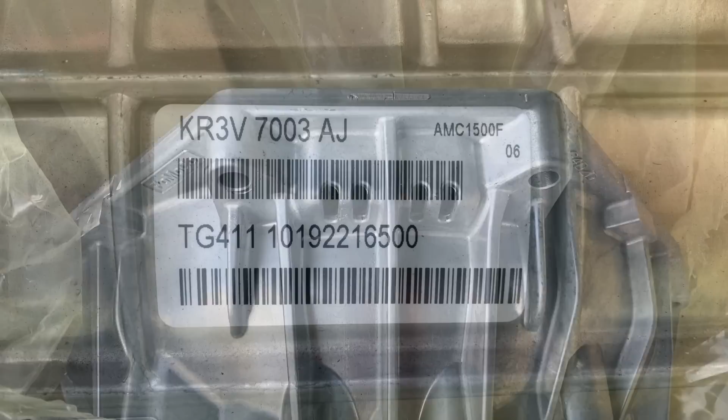I'm here again with Carey, the Shelby Guru, the Shelby Whisperer. We've got my 2020 Shelby GT500 carbon fiber track pack up on the rack, and boom, new transmission.

What do you think of this project? Not too big, not too big. Well, not too worrisome. We're about to find out. Here we go. Thanks for watching.

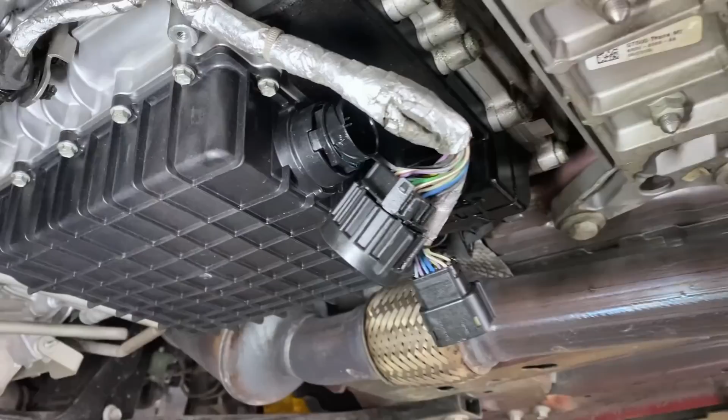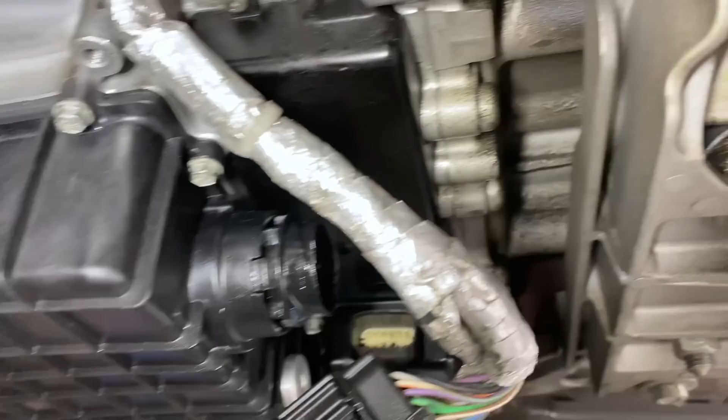Let's talk about why I'm getting a new trans. First of all, my trans works great, and I drive this car a lot. But if you see back here, it's all wet. Back up in there, it's got a slow leak in a non-serviceable area, so it's always wet on the back side. You can see all up in there, and there's some trans fluid there. So, a new tranny.

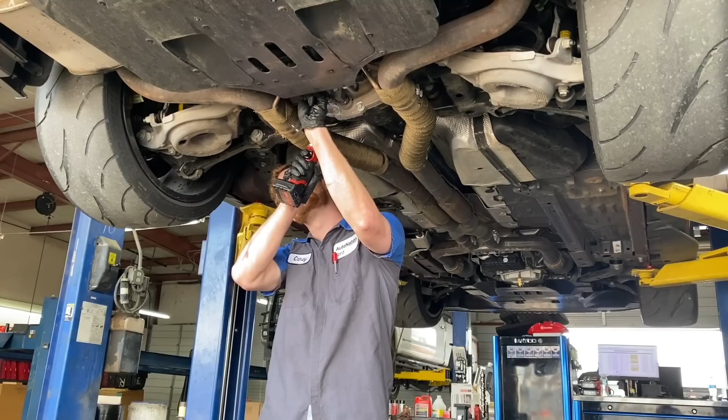Carey, you taking the exhaust off first? Yeah, to get access, makes sense. Start with the rock catcher, the closeout panels full of rocks.

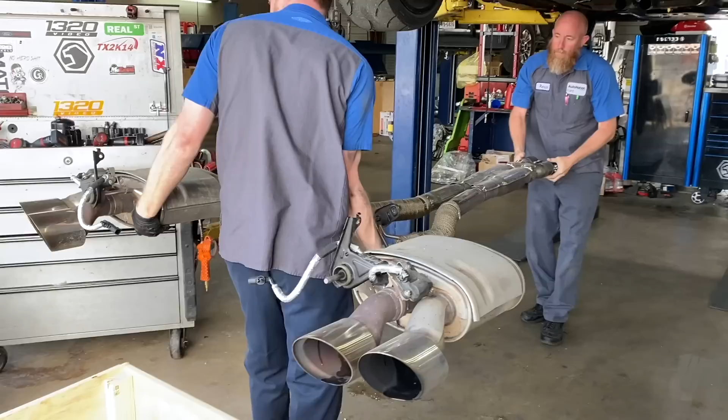Taking off heat shielding. Taking off the bottom closeout panel up front.

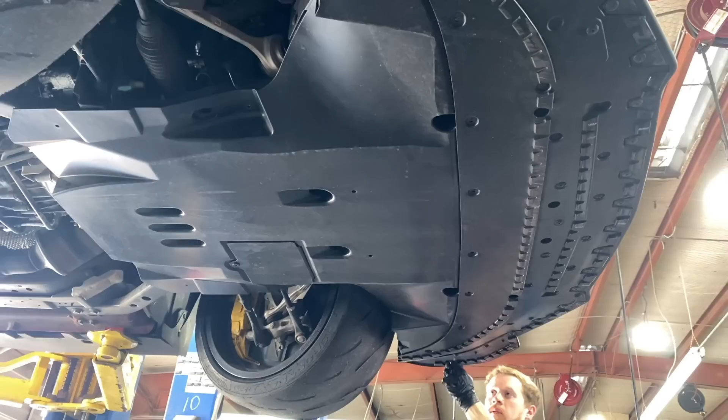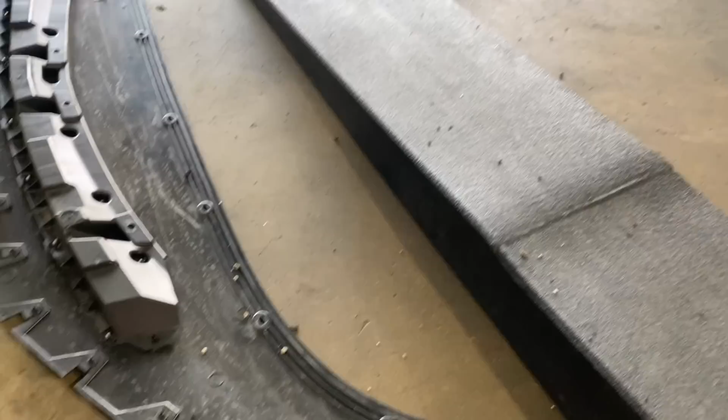In order to get the closeout panel off, you got to take the bottom piece of the splitter out. In order to get the bottom piece of the splitter out, you got to get the splitter wickers off, if your car has those. Splitter wickers and the bottom piece of the splitter are off. There's the bottom piece of the splitter. Now you can get access to the bolts in the front of the closeout panel.

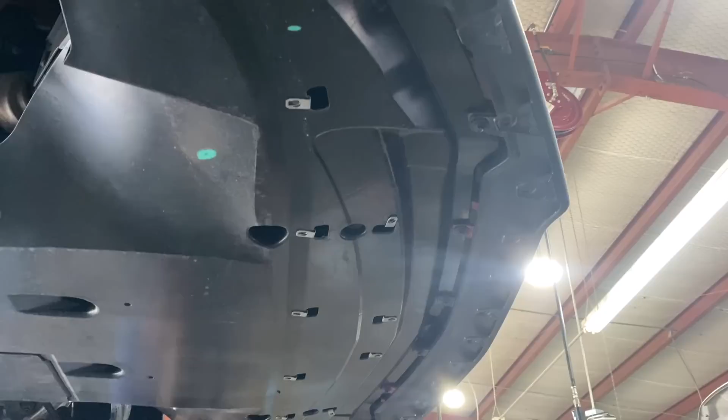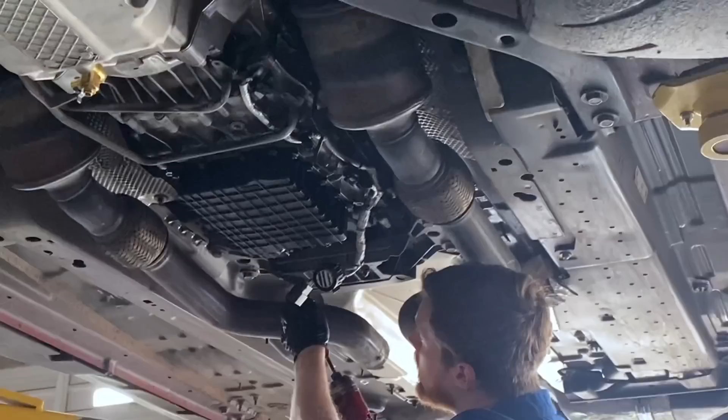Mr. Carey, what you doing now? Took the trans fluid lines loose, and then I'm going to go ahead and take the driveshaft heat shield off. Using a 24 millimeter socket to take off the driveshaft heat shield.

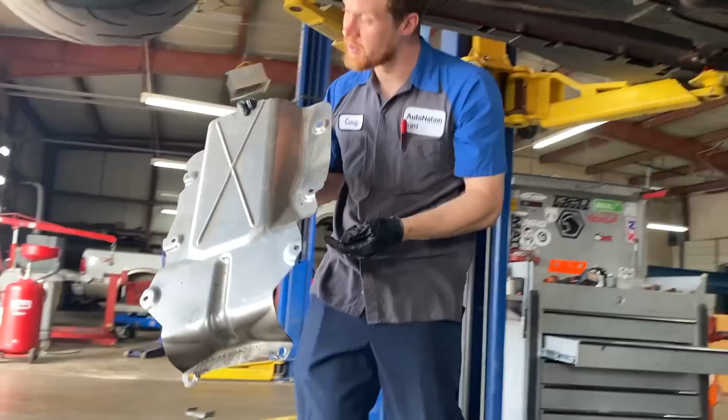Kind of weird nuts on those, something along those lines that I don't quite understand. Driveshaft heat shield off. Marking the drive shaft to the rear there? Yes, you would do it up front if we weren't replacing the trans. Parts are accumulating.

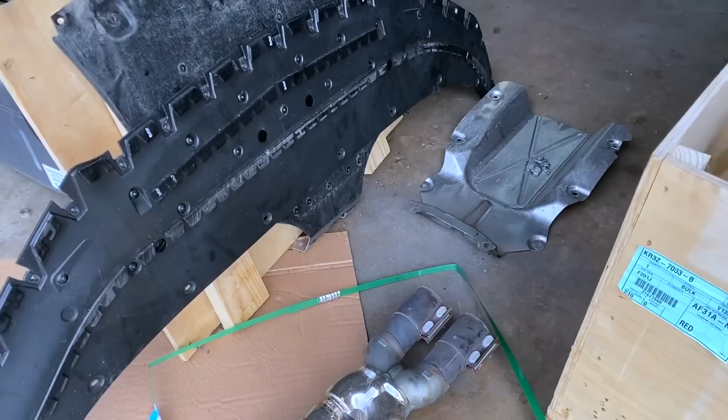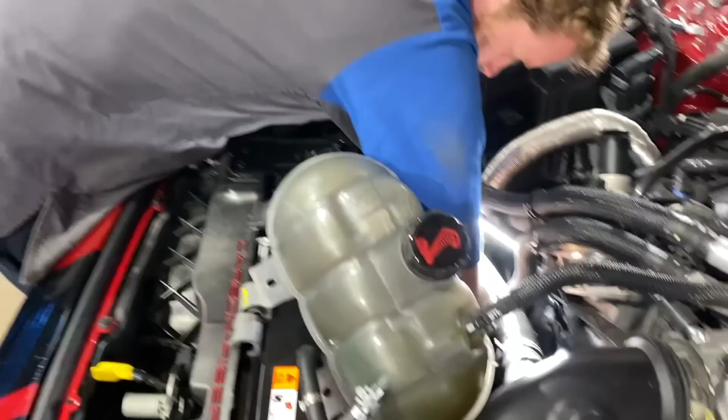Closeout panels, shielding, new trans. What you doing down there, Mr. Carey? Disconnecting trans lines - the transmission cooler lines.

What you doing up there, Carey? Pulling the starter off to get it out of the way, just to clear up room so I can pull out the trans lines as easily as possible to prevent tweaking them.

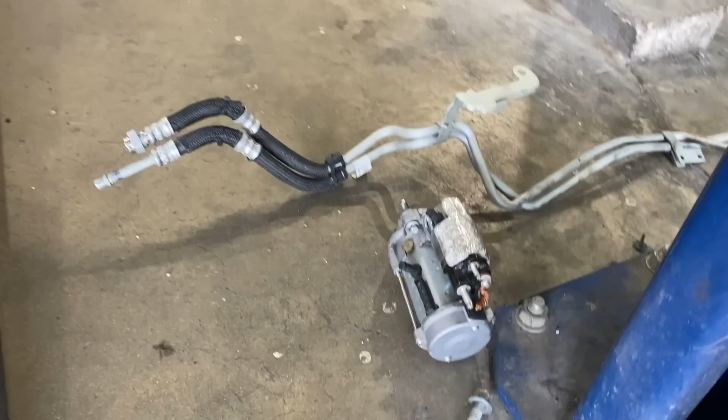What you working on now, Mr. Carey? Moving the trans cooler bracket out of the way. And then over here we have the starter and trans cooler lines removed.

All right, time to remove the cats. Sometimes these upper - is it a bolt or nuts? It's a nut on a stud, the stud is through the cat. Sometimes they're a pain in the ass, huh? Yes. Oh, that one's bad. Ah, good.

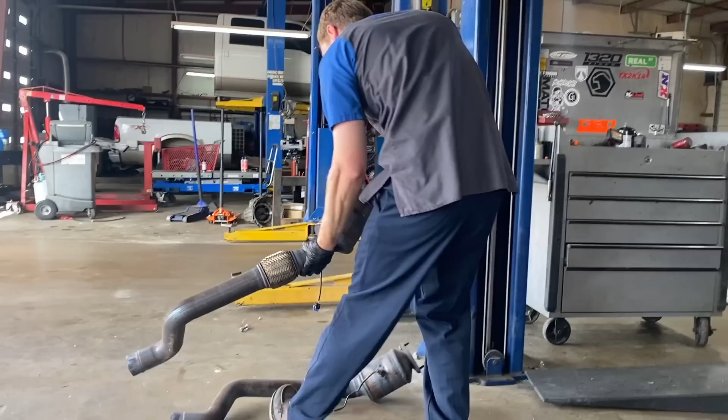All right, cats are coming out. One cat, two cats. Drive shaft coming out.

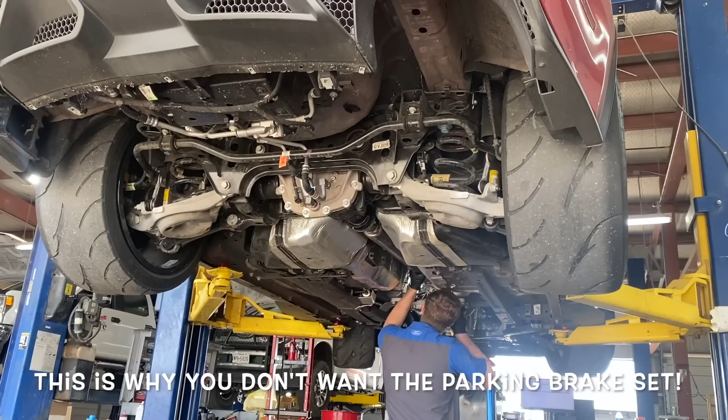Working on the manual park override, getting to that release from underneath the car. Carey held the override, which is spring loaded, and then we rotated the tire to get the drive shaft rotated so we can get to the bolts that were up on top, which are now on the bottom, working on getting the drive shaft out.

There was a little bit of a battle, but the drive shaft is out. Be careful with that, because they're supposed to be scrapped if dropped.

So Carey just pointed out a fun little Easter egg - the rear trans mount here.

Booyah! All right, Carey, what's the challenge of getting stuff off the top there? What are y'all working on? There's just no room, just squeezing my hand up there.

And how many connectors are up there? It's not necessarily the connectors. There's the park override cable, and then the transmission vent tube I got pushed off, and then there's a wire harness that covers one of the bell housing bolts. The harness has enough slack that once I pull the bell housing bolts out, I can drop the trans just a little bit.

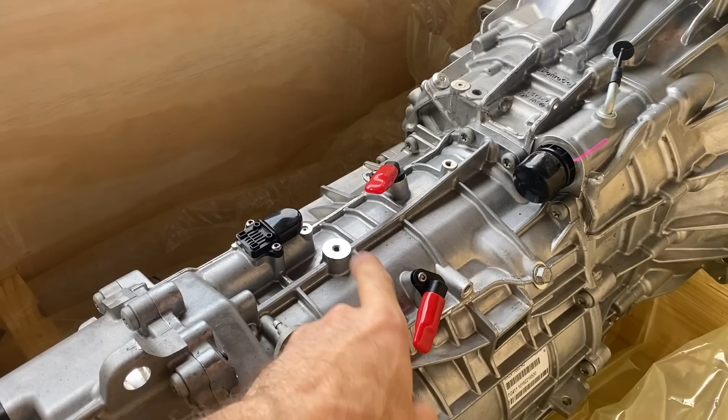Okay, pulling my harness off of the trans. Looking at the new trans here, it looks like there's 2 harnesses up top. Well, there's one main harness, but it runs over this bolt, and then down - this is your trans vent. There's a plug here and a plug here. Oh, and these are plugs as well. Oh, okay, look at that. I didn't know what those were.

Alright, to get all the connectors off the top - I haven't taken the connectors off, I've taken the bell housing bolts, and we're going to see if they'll separate. Okay, it's got the hoist.

So you can drop the trans down just a bit and then get the wiring harnesses off. Oh, there you go, yeah. It was just a little tension on the shaft. Just trying to get it to... alright, I do the back and forth wiggle to break it free.

There's all those hard to get to wires - connectors. It's all one harness with multiple connectors. How many connectors are up there? I didn't count, a lot. One bulkhead, 3 what look like speed sensors, and 1 position sensor. So 5 total? Yes, okay. And then a plethora of push pins. Oh, fun.

Well, there it is, it's out. Alright, taking a look at the one that just came out.

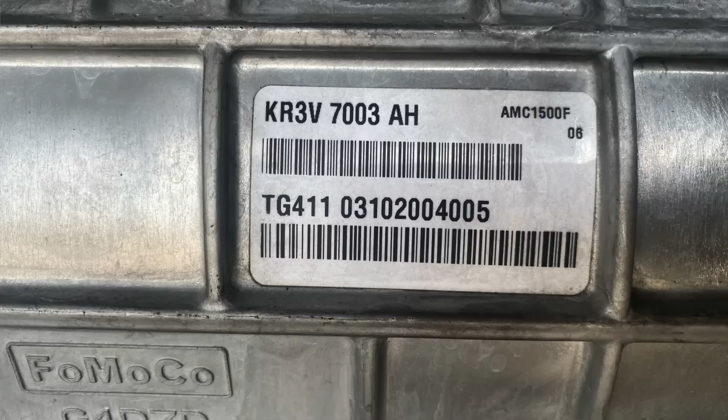Carey just pointed out that the part number changed. The old one's part number ended in AJ - wait, the old one was Alpha Hotel, and this one's Alpha Juliet. So AH to AJ, huh? Old to new? Yes. Alright, new kid on the block.

Alright, general plan of putting this sucker back in? Lift it, line it up, and we may have to turn the crank a little bit to get the splines lined up for the input shaft. Okay, and other than that, it's...

And then trying to get all those damn connectors from the wire harness? Well, they plug in a whole lot easier than they unplug. Oh okay, that's good news. Alright, here goes nothing.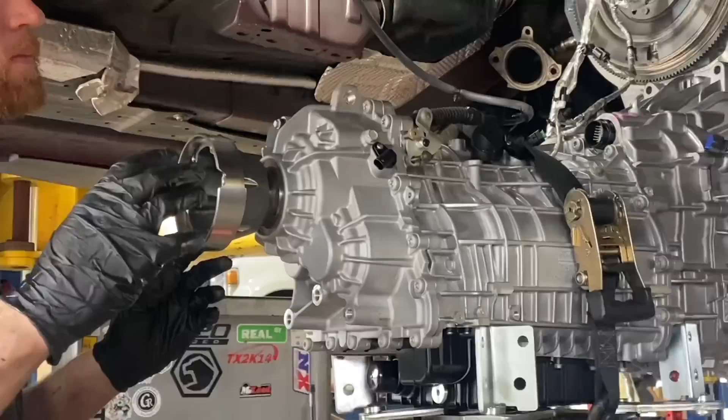That's the manual park override cable? Yes. And I went ahead - I just have a bolt, which is a stay-in part bolt essentially, so that when they ship it, they put a bolt in here. I put a longer bolt in there so it'll be out of park, and I can rotate the drive shaft while I'm installing it, and then I can just reach up there and pull the bolt. Smart.

What are you reaching up there for? The top bell housing bolts, getting them started in the engine, and kind of lining up wiring harnesses and such on top of the trans. With the weight of the trans on the engine, it's kind of sagging down, which gives you access there. Yes, helpful - use the trans as a little bit of counterweight and pull the motor backwards.

Alright, here comes the long extension. There's 2 bolts up at the top, on the bell housing.

Alright, got the rear transmission mount back in place. Got all the connectors connected up on top there, Mr. Carey - all the electrical connectors and push pins back in place. Ready to...

Lift it up and connect it - lift it up and put the bolts in for the rear transmission. Alright.

35 pounds of torque. The top ones you just got to make tight because you can't really get up there with a torque wrench. New gasket. New gaskets and new nuts. New nuts, alright. The cats - I guess the cats will go back on.

Tightening down the nuts on the cats. Yes. Are they easy to get to? No. No, one of them - well, I mean 2 of them are not. 3 of them aren't bad. One of them, pain in the ass - the passenger side upper one, is no fun.

Torquing the tranny mount bolts. It's torqued to... 26 foot-pounds? 46. Oh, 46. Thanks. Putting new seals on the transcooler lines. Alright.

What are you doing up there? We got the starter on. Nice. Trans lines on.

Everything needs to be torqued, and here forward should be about ready to go. Well, there's a hole under. Oh yeah, disregard that. I know what you meant though. Outstanding. Drive shaft going back in.

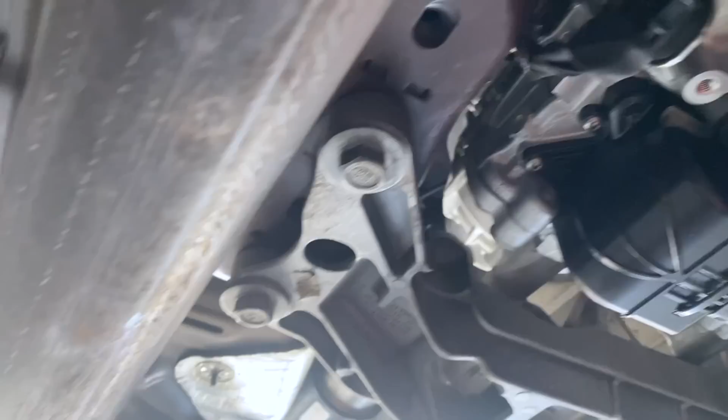What's the torque on those guys? 76 foot-pounds. Torquing down the bolts on the drive shaft. Having to hold the rear tires in place to keep them from spinning. Did all the fronts, did 3 on the back side here, and now pulling the trans park override to lock it in place.

There we go, nice. Then you can tighten the other 3, which are on the bottom. We oriented those properly first. Drive shaft heat shield going in.

What size socket? 24 millimeter goes on there. Torquing all the bolts for the cooler lines. Are those for the brackets? For the brackets as well as the tube in the transmission.

Got the heat shielding back in place on the driver's side. Driver's side and the passenger side's on as well. Oh yeah, disregard, back here. I was looking up over here. Exhaust and the closeout panels.

I think we're gonna fire it up before we do that. Okay, smart.

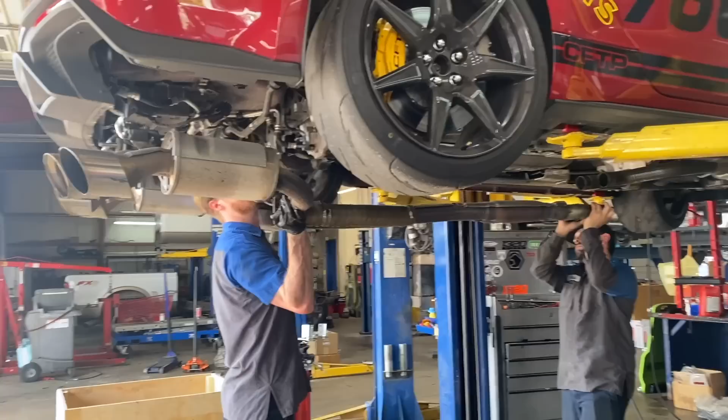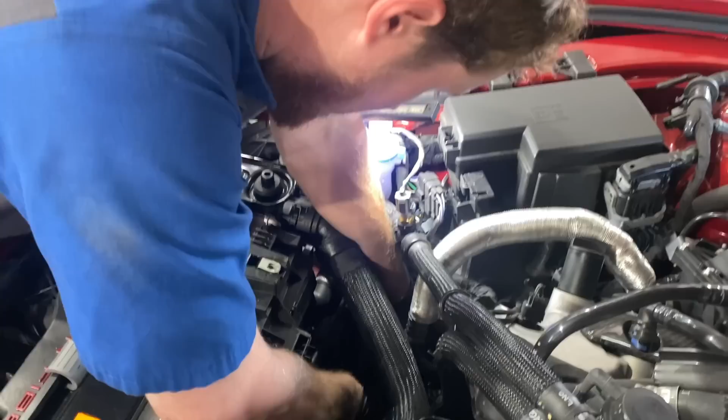Got the car down from the lift and reaching in from the top to connect the trans cooler line. Is that what you're doing down there? Yes, well I'm gonna put the clip on first. All right.

All right, time to fire it up. Moment of truth. Well, it's running. We pulled the negative battery cable, so we lost all the data.

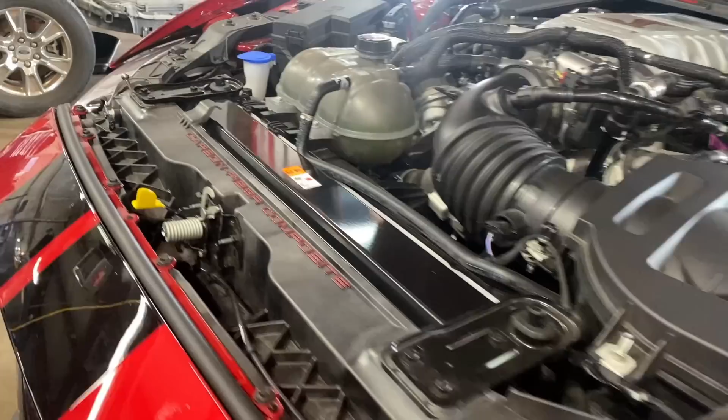Car has 9,300 miles on it. We just ran the engine for 7 minutes. I cycled the gears to drive and then reverse to make sure everything's functioning properly. The 7 minutes is to get the trans fluid to cycle through the coolers.

Now we're going to top off the transmission. Filling up the trans. I'm gonna move this to catch it when it comes out. Right there, topping it off. Looks like it's taking a fair amount of fluid.

I started with 3, I don't think we'll need more than 3. It came full, but once you connect it to the lines and run it through all the plumbing, then it's no longer full. All right, it's running out, it's full. Maybe it didn't even take a liter, did it? No. A quarter of a liter, maybe.

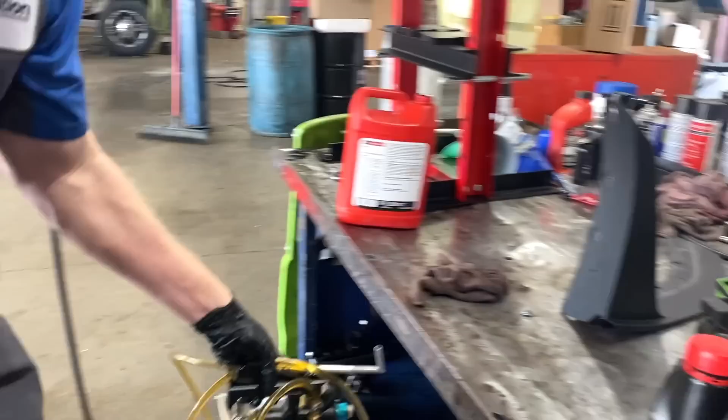Carey's putting all the closeout panels, splitter, wickers, front and back panels, all back on the car, buttoning it up.

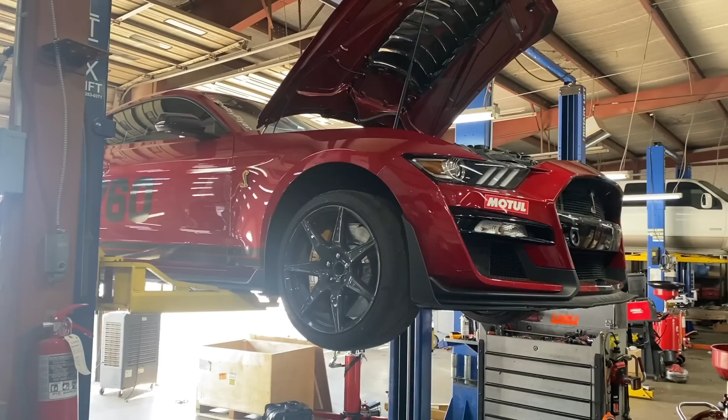Looking complete again, just need some wickers. Coming down, I believe the project is done.

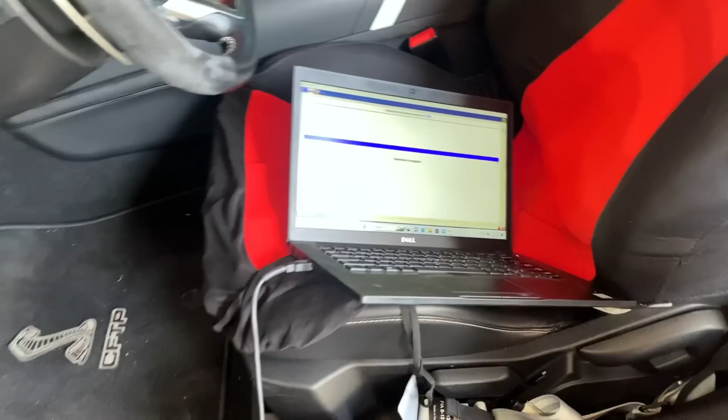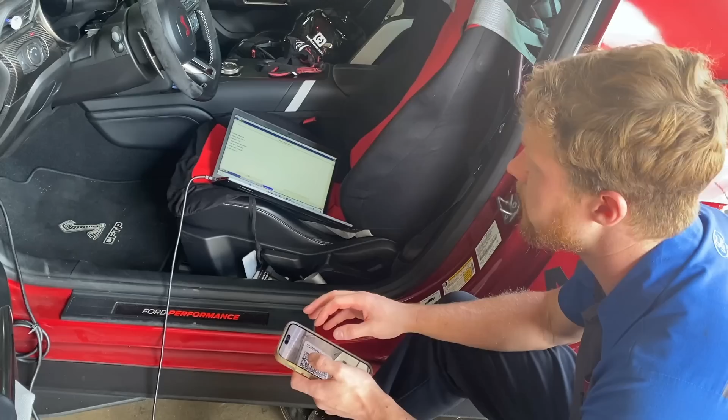All right, Mr. Carey, which programming? The transmission IDN, I think is what they called it. This is a 2020, so you're using IDS. Yes. 21 and 22 use FDRS, which is Ford's newer diagnostic software.

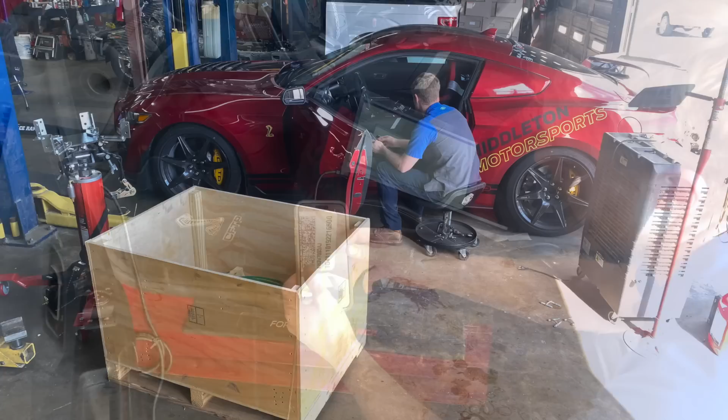And then you take a picture there. Yes, and you gotta put that in there. Okay, we have 11 digits. Success? Yes, okay.

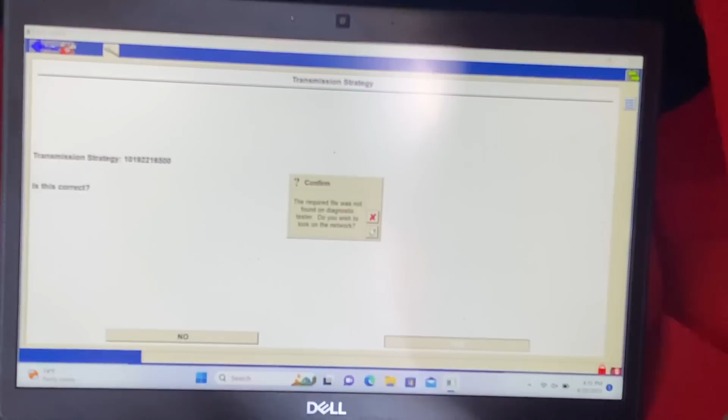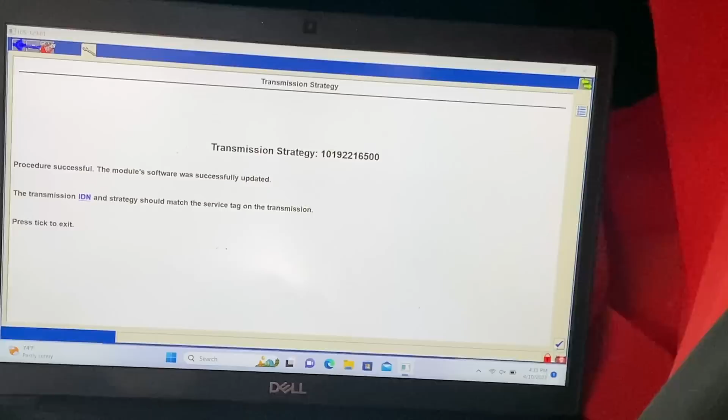Looks like it worked.

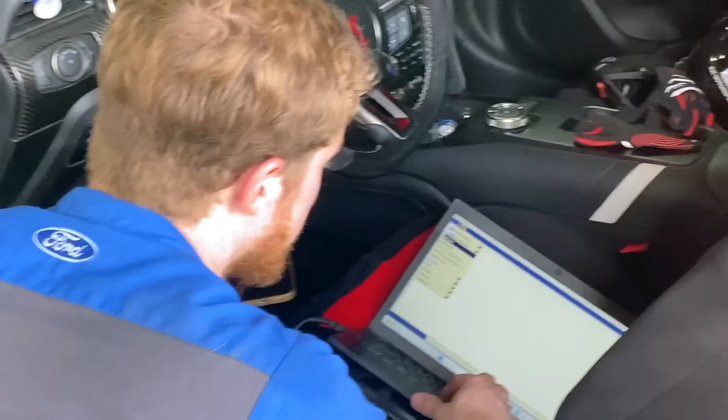I'm going to clear DTCs and then you can go take it for a spin around the block. Okay, make sure it doesn't explode. That's our main, that's top of the list.

I just went for a test drive, and the trans didn't fall out. The exhaust didn't fall out. It shifted. I think it's a success.

I think it worked. This is the Shelby Guru. Thoughts on this project, on changing a trans out on these cars? Wasn't too bad at all. We took a good portion of the day, but nothing about it was difficult or extraordinary, other than getting the little stuff on the top up there. That wasn't fun.